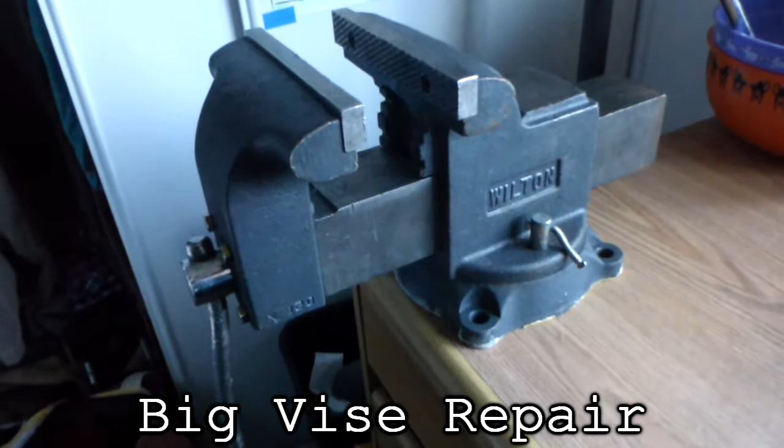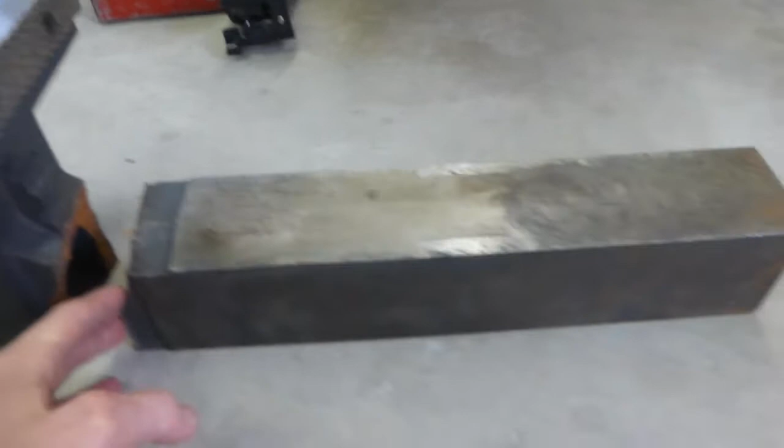Alright, I'm gonna attempt to fix this vise. Someone broke it at work and I fished it out of the scrap bin. I'm gonna attempt to face this off and tap some holes in here. I got some 3.5-inch bolts that are 1/4 inch, but I think I'm gonna go for 5/16 because there's actually more thickness there than I thought. This probably isn't gonna fit in my machine vertically, so I'm gonna see if I can do some trick horizontal milling setup with my lathe.

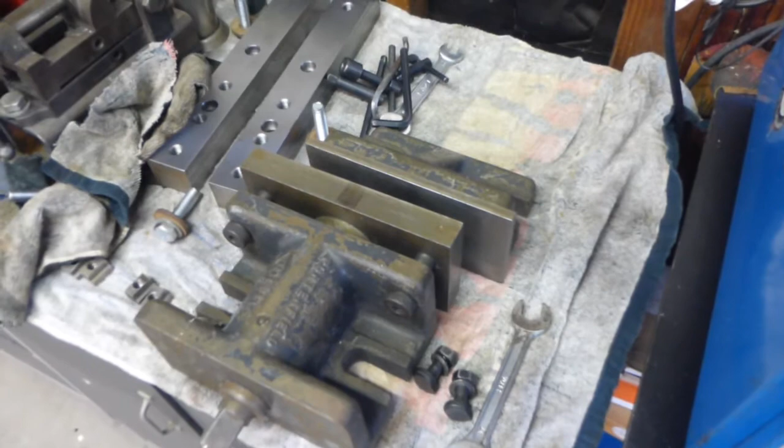We'll see what happens. Alright, today the big vise gets its chance to shine, so we gotta take off the little one, put it on the table.

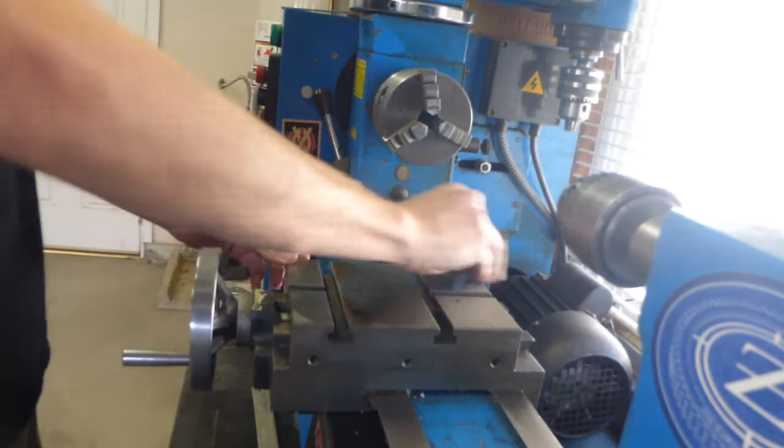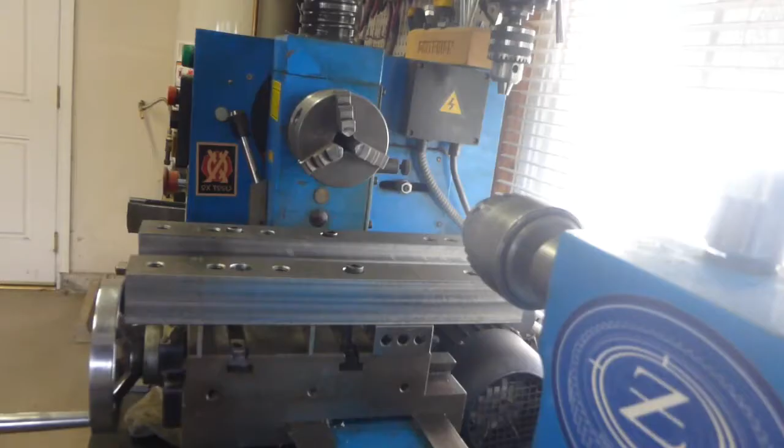So I realized I still didn't have the bolts for bolting the parallels down, except the long ones for when I put the 1-2-3 block under it. And I think that's the setup we need anyways today to lift the vise up higher. So that's what we'll be doing.

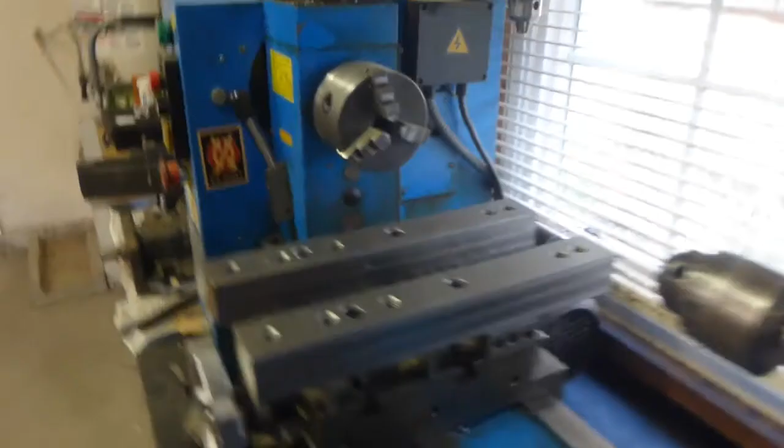Now it's probably not the most secure looking setup in the world because over here I have actual 1-2-3 blocks, but over here I don't have 4 of them, so we just use precision 1-inch parallels and they're not moving, so I'm pretty satisfied. Now to bolt the vise on.

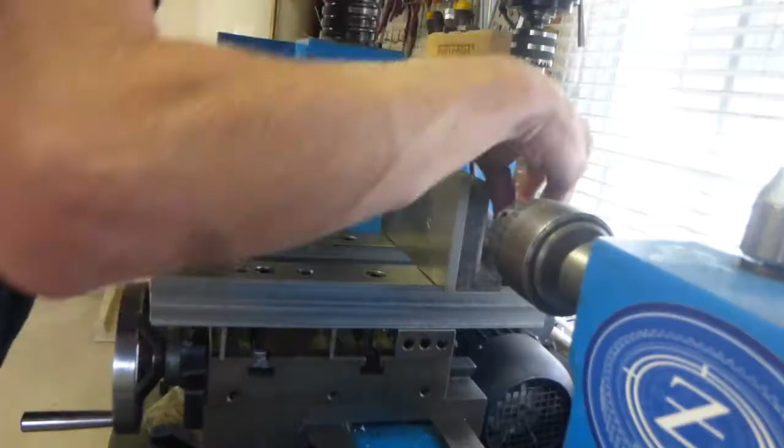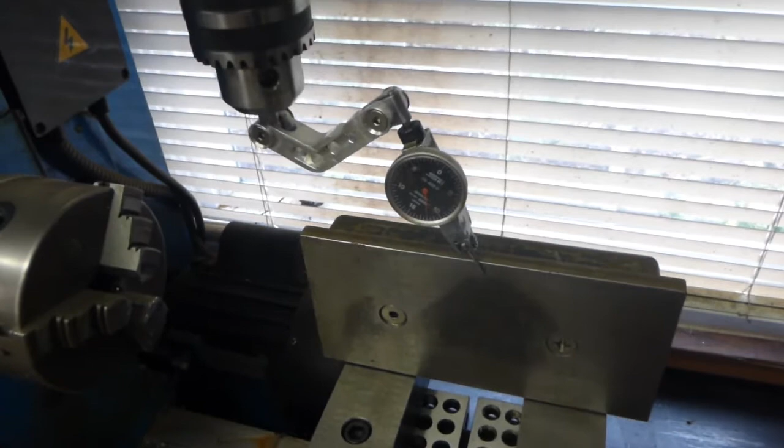Alright, I got it pretty close. I'll check it again once I get the part in there. But this vise jaw isn't necessarily flat. Doesn't look surface ground, just blanchard ground. So it might be dished somewhere along there.

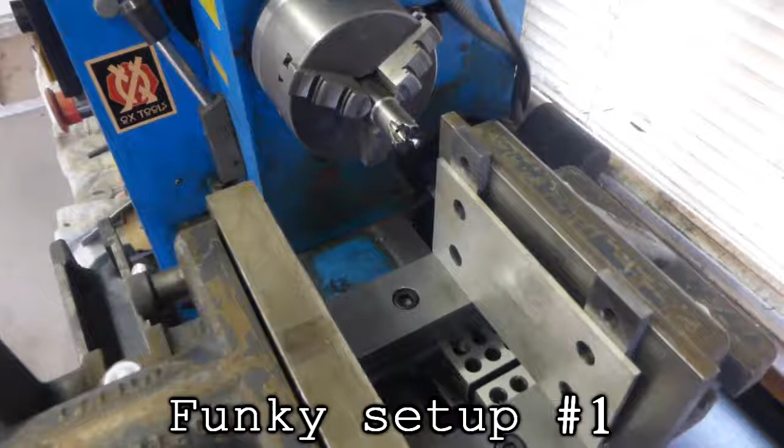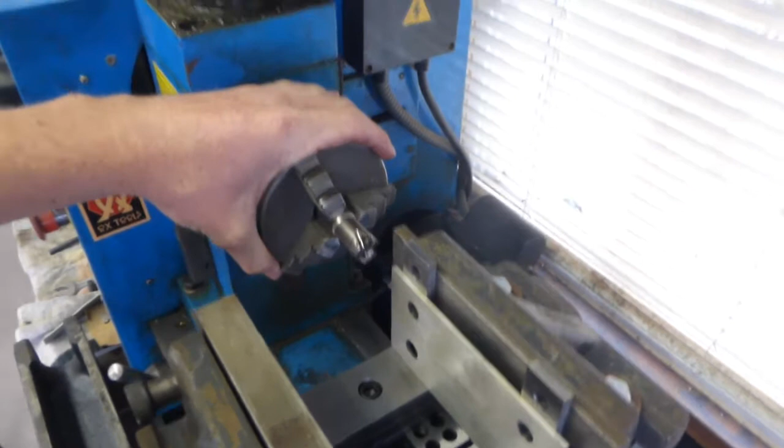Alright, I'm setting up for the horizontal milling step. I've never actually done this before, but I've seen people do it online and might actually be more successful than the vertical milling, or more rigid, I'd say.

I have all these parallels set up. I had to put these ones in because the travel limit prevents me from going all the way to the end. And at least like this I'll be able to get the roughing steps done or just mill all that out. Probably not the location of the holes because I have no way of raising it up and down. Unless I just uniformly drill them from the sides. We'll see.

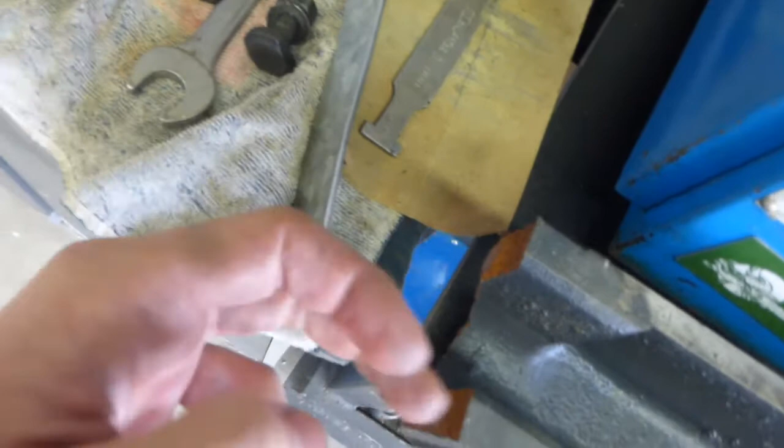Let's play put the camera right in the metal chip zone.

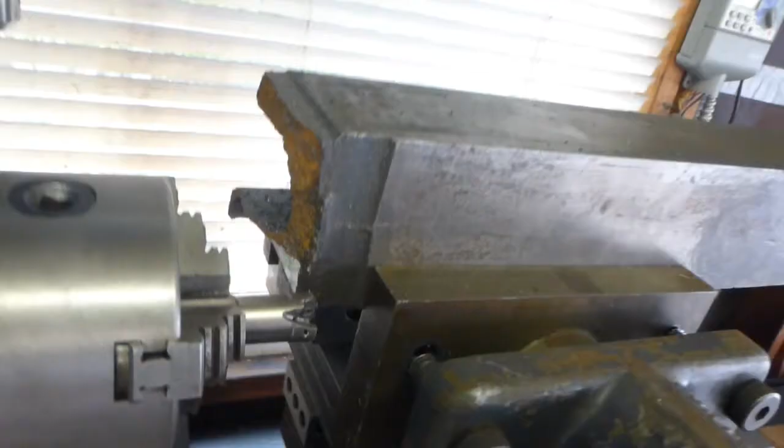Now I must say I'm very impressed. I don't think I've ever taken a 40 thou depth of cut on this machine, especially not with the vertical milling, because horizontal milling is so much more rigid because you got all that support versus having to arch over like this, and even exaggerated here because this just bolts onto a cylindrical shaft.

But also the favorable cutting conditions today. We got cast iron, which is pretty soft. And this, my Seco cutter's back in service after crashing it in the molding press video.

I think I'm going to drop the parallels about 1/8 of an inch so I can cut the rest of that web off right there and adjust it so it can travel all the way to the end. I think when I face the finishing pass, I'll either do it in the vertical with a really long end mill, or I'll just get a fly cutter that's like that big in diameter and lower this down so it just cuts it all in one swoop.

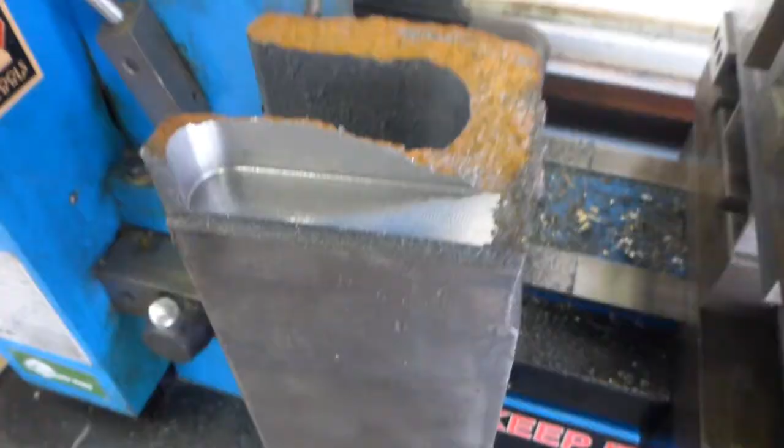Yeah, that looks righteous. Even that finish is nice.

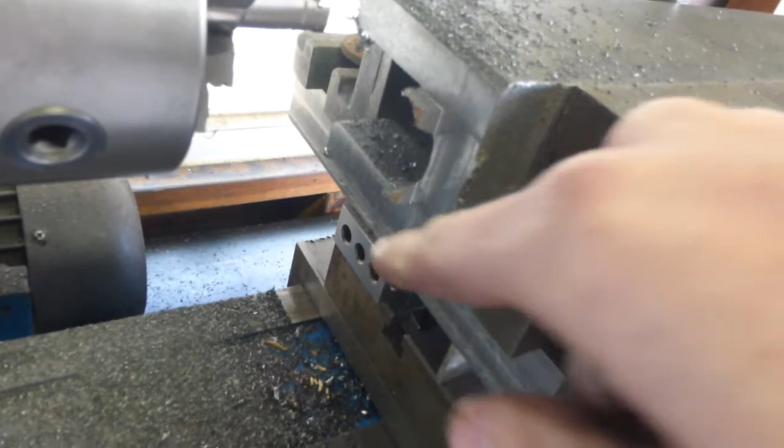Alright, so now I got those 3 setups done, all these edges roughed out. I think I'm just going to hit down these islands on the bench grinder so I don't have to do another setup for that. Next I'm going to figure out how to hold it there so I can fly cut the whole thing in one pass.

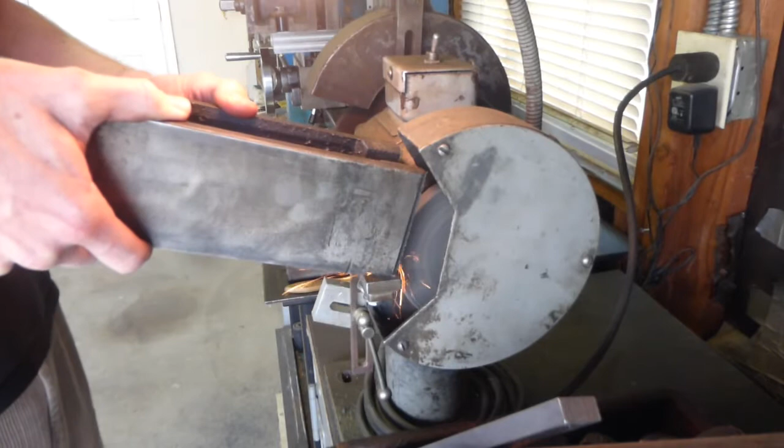Got rid of those islands, getting ready to fly cut. Burning paint smell. I didn't even know this was painted. It just looks like metal color. Yeah, that stuff was pretty soft. Cast iron. Hey, while we're at it, let's just mill this side in the same setup.

Alright, I think I'm just going to do the rest in the vertical mill setup because this setup isn't as rigid as when I have the longer beam right there. This thing started moving when I was cutting it. But as to that, here's a lesson on how brittle cast iron is.

That was easy. Break them off.

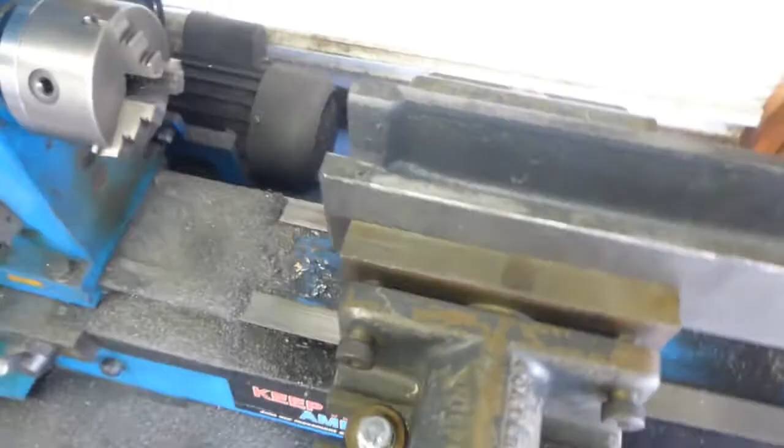Alright, so I had to re-indicate the vise because gripping the half of the vise right here caused this side to open up, so I re-indicated this flat again. One complaint I have about this vise is it's not like those Kurt vises that have that angled thing that pushes down as you push in, so as you tighten it, it kind of lifts up. As a result, my parallels on this side have been repeatedly loose while this side is tight. So that's just something to consider.

But as far as fly cutting this end, if it's tilted this way, it shouldn't be a problem. I'd only be worried if it's off this way or this way. But I'll indicate it in, make sure it's close enough. And I'm thankful that the wall thickness right here is good enough that I can tap a hole in there, which I'll do later.

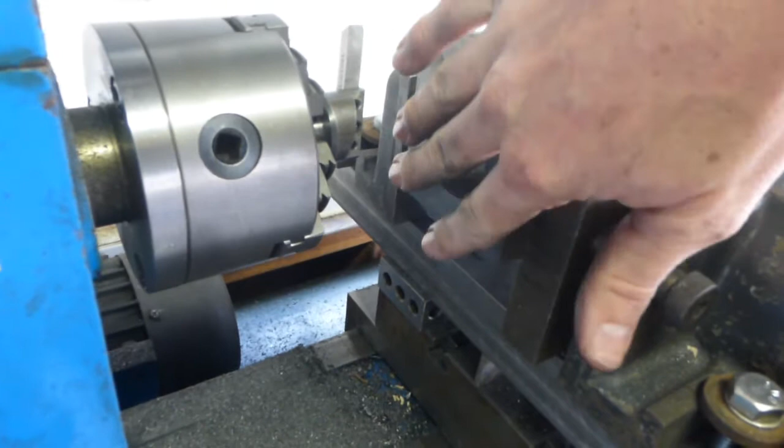Well, that took a lot longer than I wanted it to, mainly because I left a low spot in the corner when I did the roughing passes, but I was able to get it off at long last, and I have a surface that is smooth. That way when they bolt together, there will be no doubt that they're together.

Oh, and I think I found out why this vise broke. Because it was made in metric fastener land.

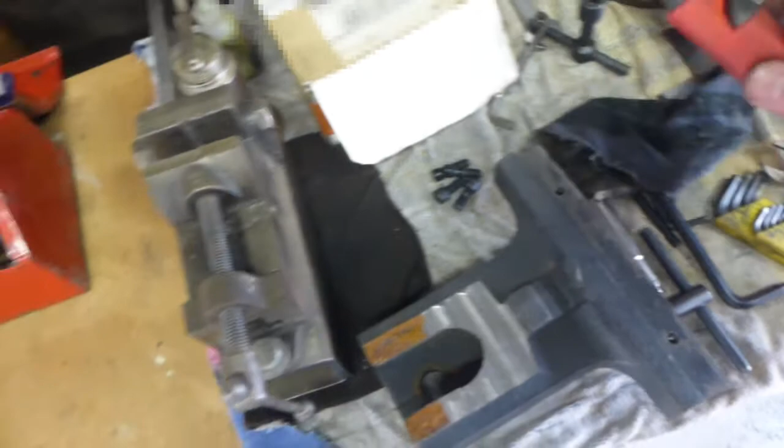And everyone knows that metric fasteners are only good for that broken IKEA furniture you find in the dumpster. Watch all my foreign viewers unsubscribe. I'm just kidding. But really, American bolts are so much easier to work with, and I'm going to add some to this so it'll stay put together. Look at me talking trash on the metric system when I have a scrap attack banner inspired by the French Revolution. Aren't they the people that invented the SI system? Well, at least their bicycles reflect that.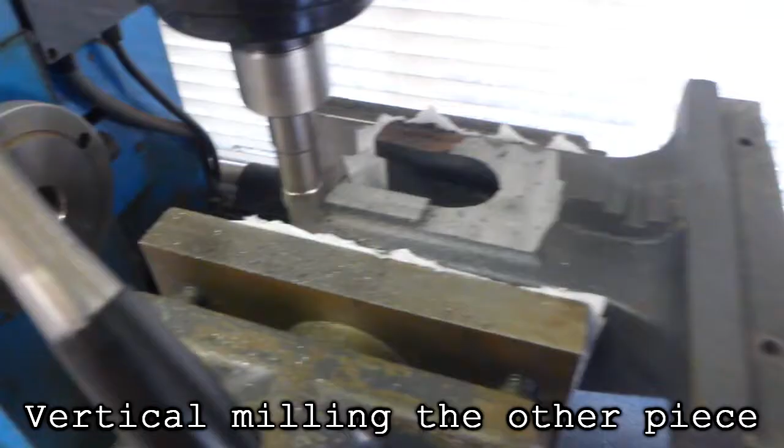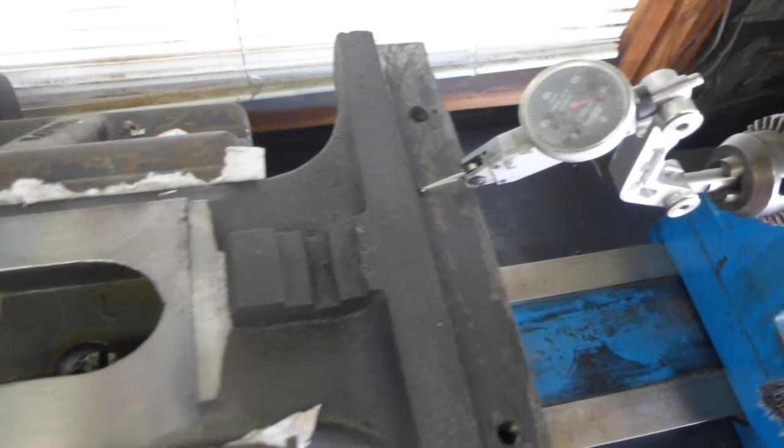Well, I managed to face this side of the vise, but I noticed that it took off more material on this side because this side looks uncut right here. So I indicated it and it looks out pretty badly off in flatness. So I'm going to set it up better and recut the fly cutting because I don't want this vise to be off by like 100 thou from end to end.

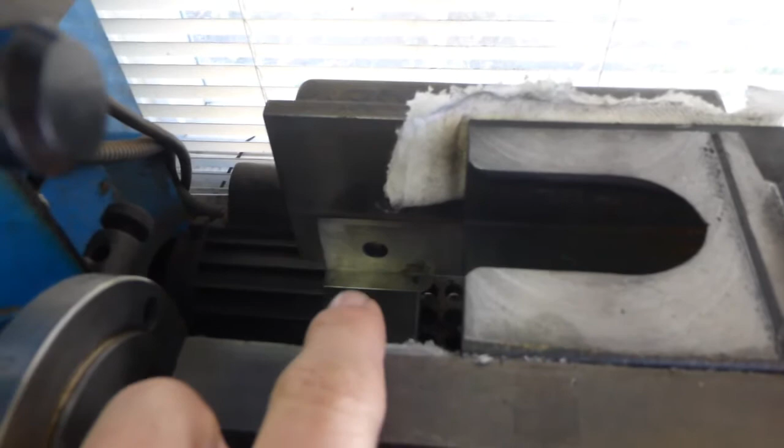That would look ugly. So I fixed the problem by putting some 25 thou shims underneath this parallel, because I mentioned before the vise was lifting up this edge. So I compensated by increasing the height of that parallel, and also by hitting it with the brass hammer a few times.

Now I'm able to get the jaw within about 10 thou from side to side, which is pretty good, and then about 5 thou this way, which is probably not as important, but better to be closer than further. This way I know when the vise comes together, it's going to be straight.

So that looks great. So I'll put the fly cutter back in and take it another few passes till it cleans up.

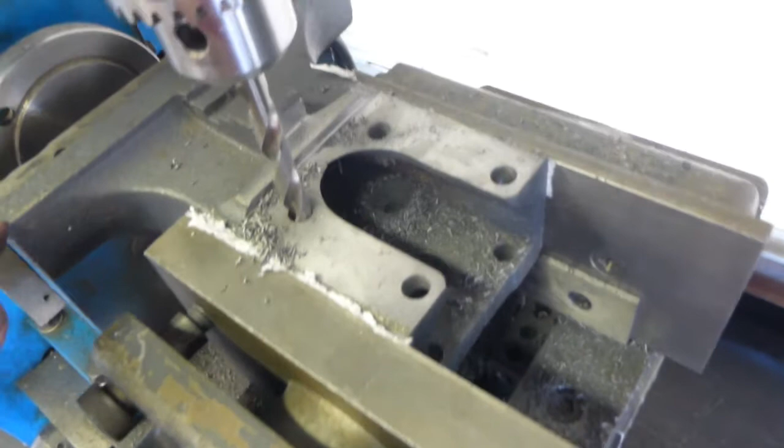Alright, I got the holes drilled in this side all the way through both sections. I had to do 2 setups because while I have this nice big vise for my machine now, I'm still limited by the amount the mill head sticks out. So while I had it over there, I couldn't reach all the way to this side of the vise. So I'm hoping these holes line up regardless of that.

And I ended up using 3/8 bolts because, well, mainly because I realized I forgot my 5/16 tap somewhere else. So I'm just going to go with 3/8 because it looks like the section is thick enough to do that.

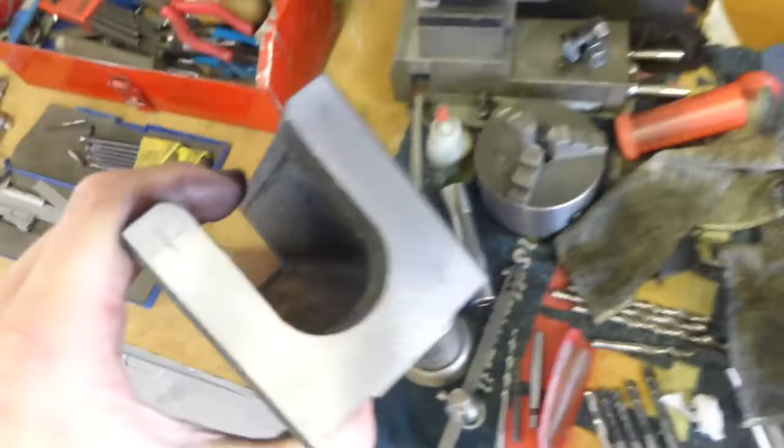This is just a 3/8 drill, so I'm trying to use the bolt holes as the alignment holes, avoiding putting dowel holes there since I don't think that would work for the same reason I couldn't set it up like that. We'll see if it lines up. Next we're going to drill and tap that.

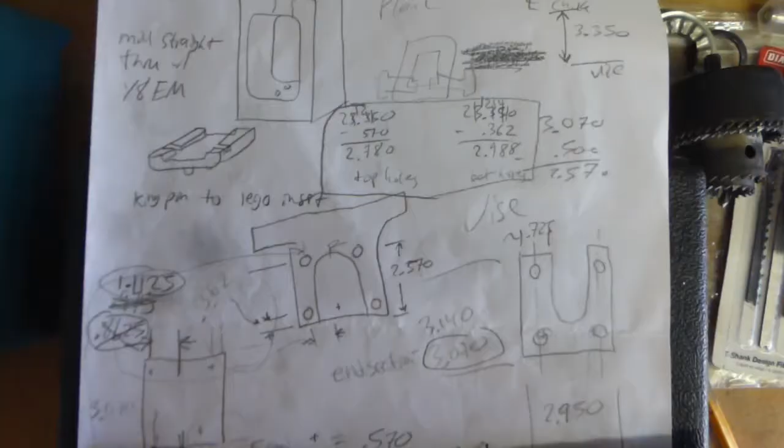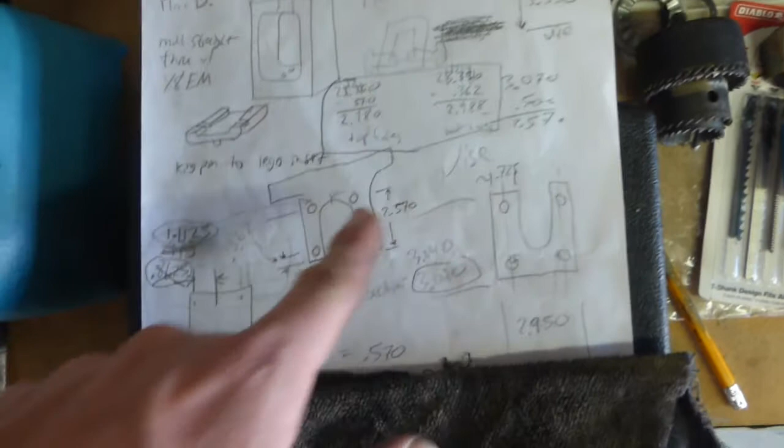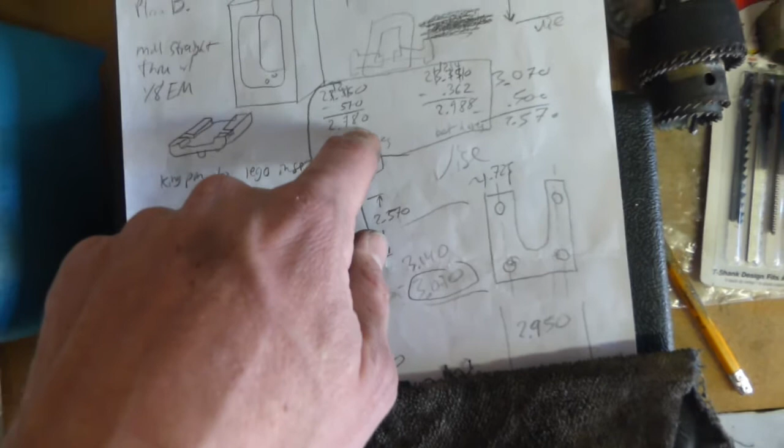For this next part I had to calculate, since I don't have access to y-axis movement, the distance from the vise to the center of the chuck, and then based on where I'm setting it up and how far from the edge I need these holes, how many parallels I need. The closest parallel I can get is 2 3/4, so I'll have to add 30 thou in shim, probably 25 thou plus a 5 thou shim. And to here I'll need about 2 7/8, plus about 1/8 shim. So that's 2 3/4 right there. Let me get my shim collection and get that thing the right height.

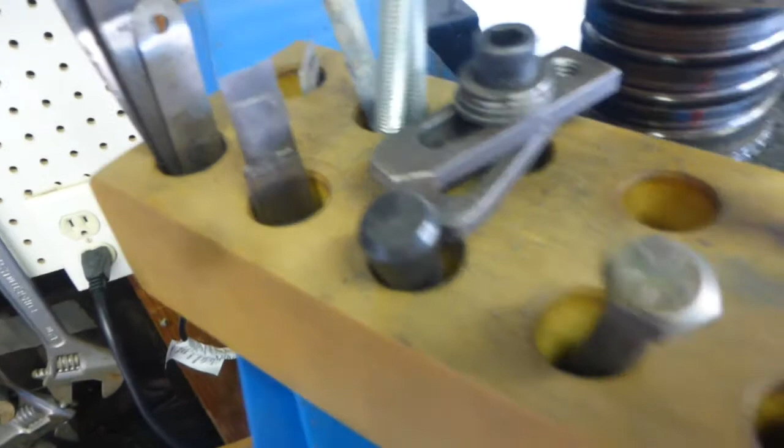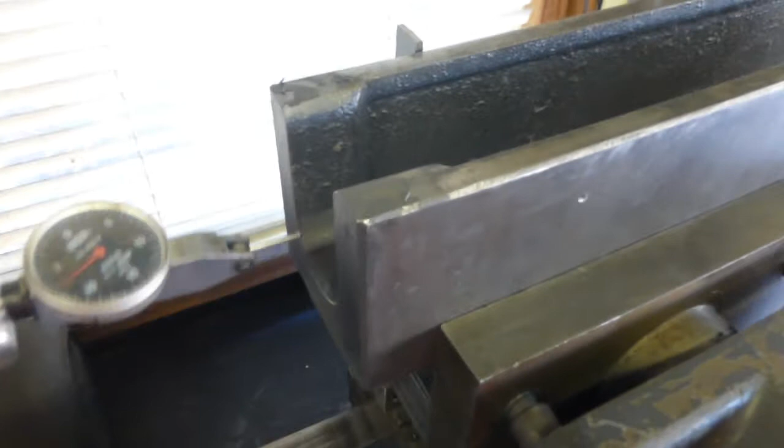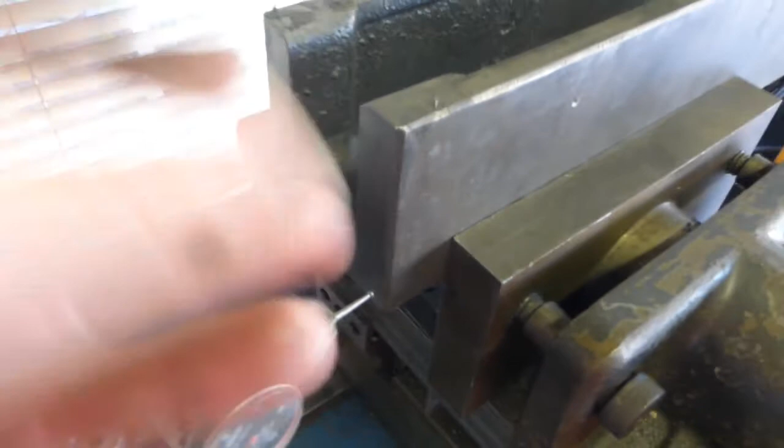So I got all my parallels and shims in there. I just indicated it on both sides. Now it's on the center line, and I've calculated the dimension to go this way and that way. So I'll drill and tap those holes, flip it over, change the shims, and drill and tap those too.

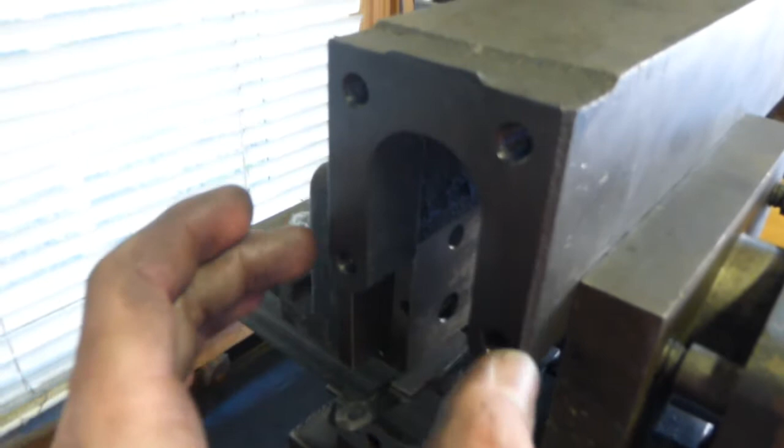So more of the same on this side, just different parallels and more shims under there, and this one's more spread out than that. So I'm going to pull it out of the vise and see if they line up.

So the bolts do go in. These ones are of course too long because I haven't bought the right length ones. I'm going to use hex heads, and a concern I had was that the vise handle might interfere with them. So what I might do is machine a 7/8 washer to fit inside that counterbore to give it a bit more clearance for when I do put the actual screws in.

Only one of the holes seemed tighter than the others, the top right one, which is still pretty impressive considering how janky my setups were. Had to do 4 different setups for 4 different holes on 2 pieces. So that's pretty good.

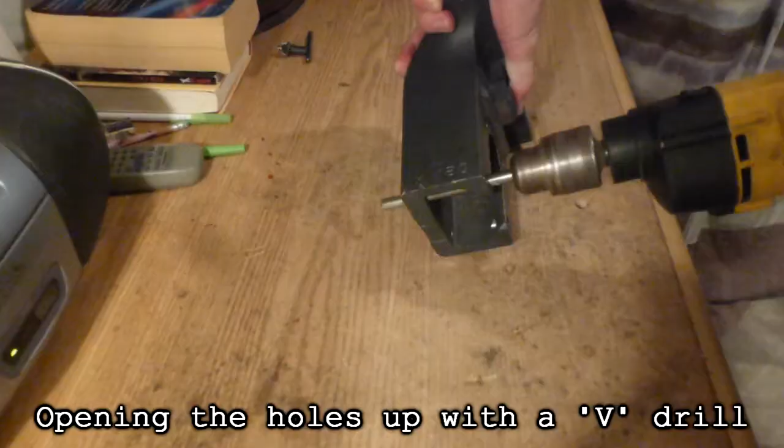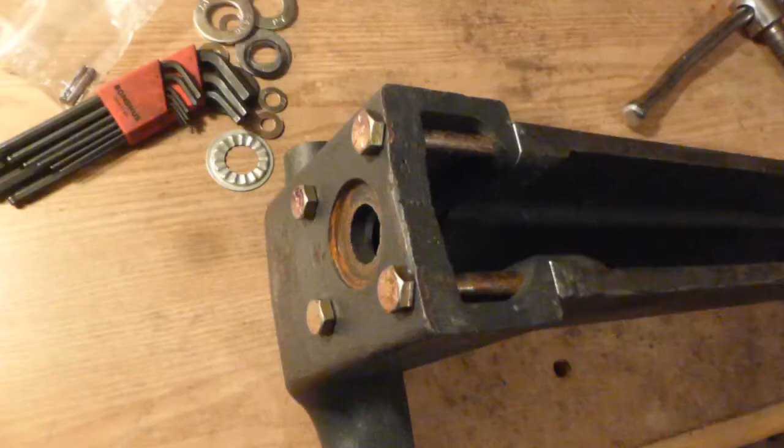Alright, so I got all the bolts in. To my amazement, there's still clearance for this handle in spite of the bolts, so I won't be needing to mess with any of those washers right there. But the only washer I am messing with is this one. There's a snap ring and a spring, and this thing was all warped and got tangled up in the spring, so I bought a bigger washer for that.

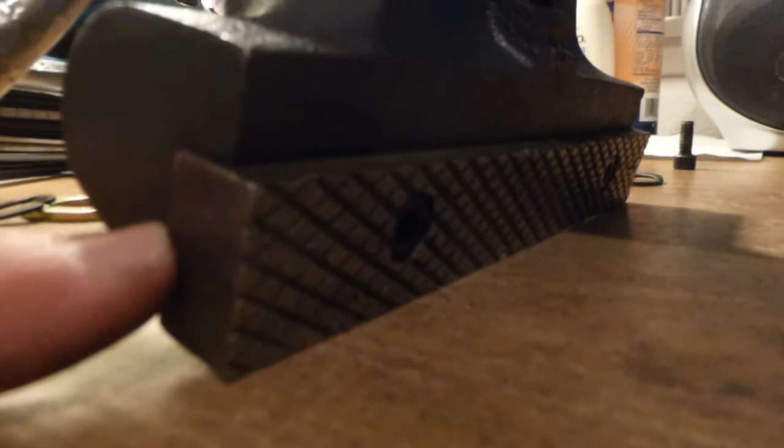Another thing I also replaced were the cap screws holding on the jaw because they were kind of messed up. But aside from that, looks like a perfect fit.

Squashy grapefruit, what are you doing in my vise? You know you already squashed enough.

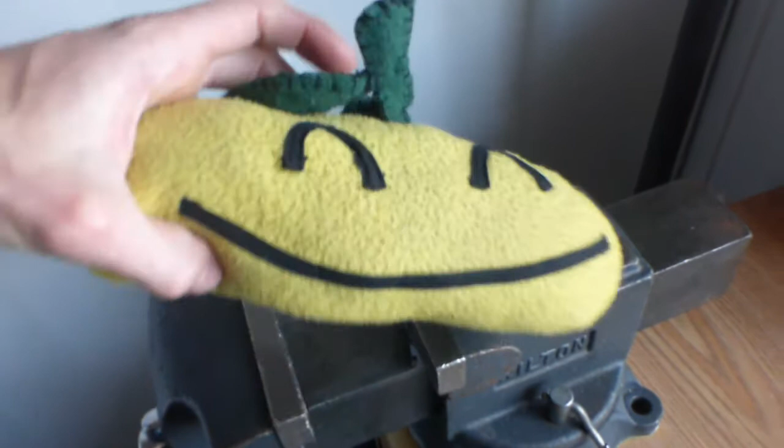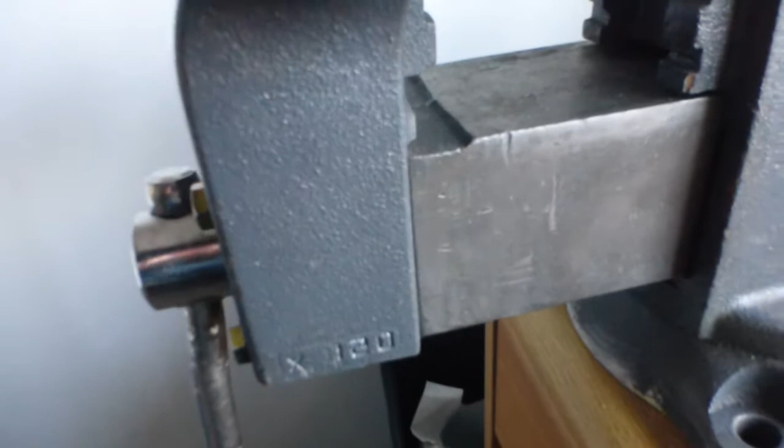So there it is, my very own Wilton vise for free, just the cost of 4 bolts and a washer. I'm thinking I probably won't be able to grip stuff in here as hard as when it originally was built, but maybe I'm wrong, maybe that made it stronger, who knows. And I mentioned the vise jaws don't come together all the way on this side by a slight amount, so I'm going to put some shim stock right behind that jaw to make them straight. Other than that, I'm pretty satisfied, and maybe I'll throw in some shots of me using it.

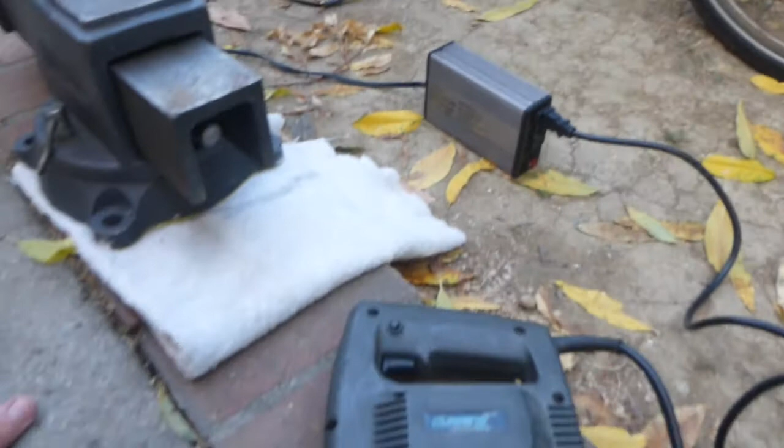So this is like a 3-in-1 test actually. Of course we're testing the vise, but secondly, my new jigsaw blade clamp, and also the jigsaw connected to my inverter and the motorcycle battery for some portable wood chopping. So let's get to cutting.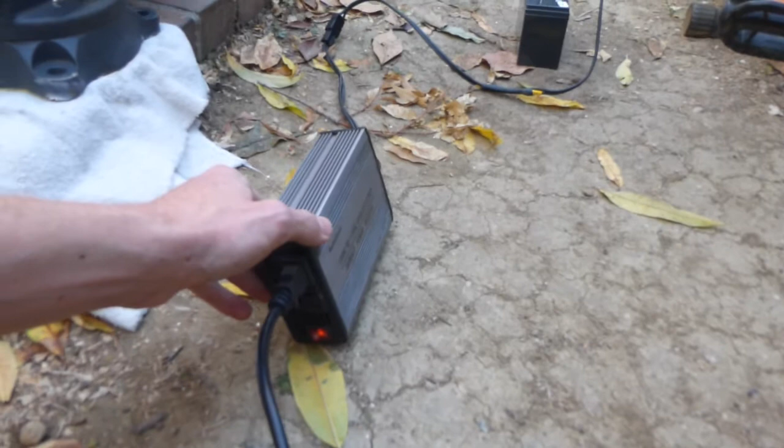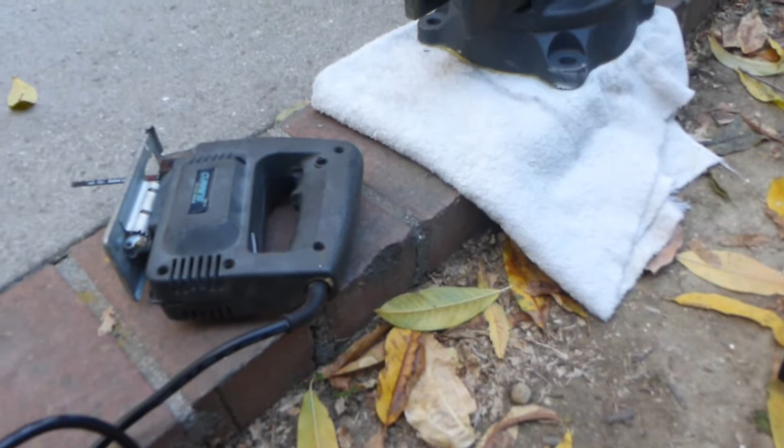Flip that on. It says 300 watts continuous. This thing says 320 watts, but this says 600 watts peak. So I guess as long as I'm not laying on the trigger the whole time, we'll be good.

Not feeling any signs of warmth in the inverter, so that's good.

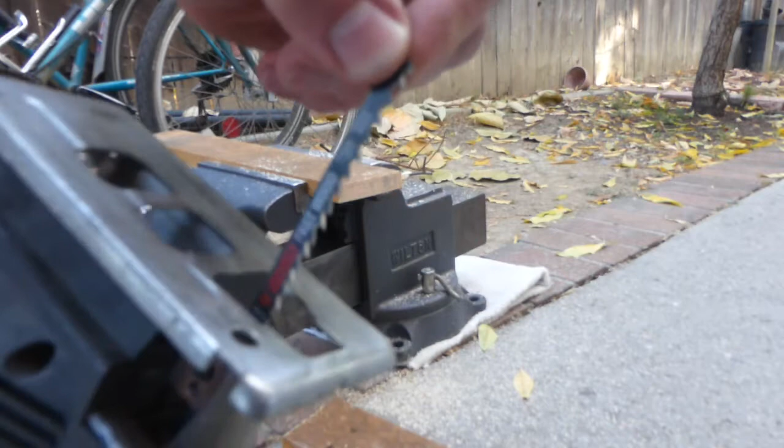Blade clamp is rigid, more rigid than ever. Yeah, with the old one the blade would just slip out because I bought the wrong kind of blades, but it said it works for most U-shank and T-shank ones.